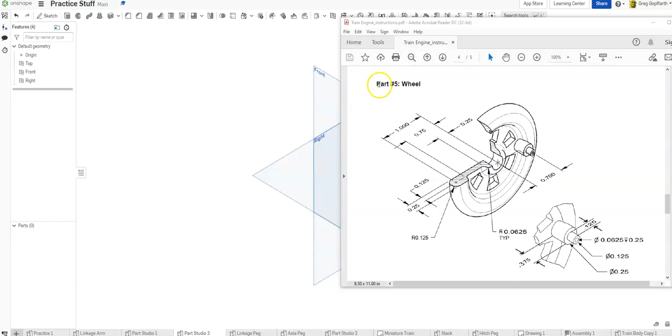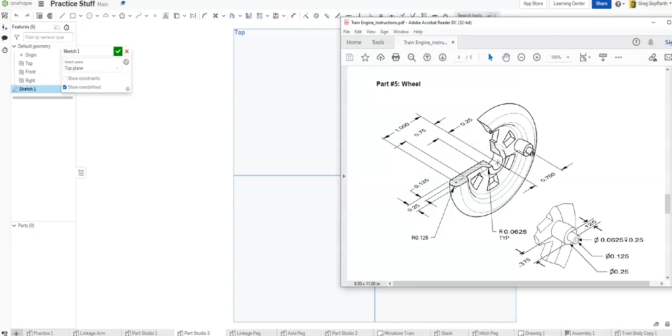That just disappeared here. There it is. So I'm going to draw this on, drawing this shaded section, on the top plane. I'm going to create a new sketch on the top plane. When I look at this, there we go. I'm going to pull this out a little further so I can have

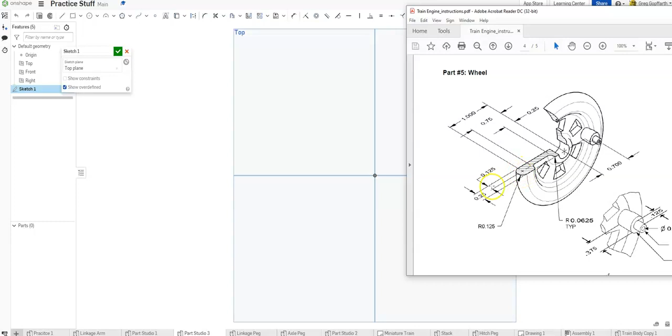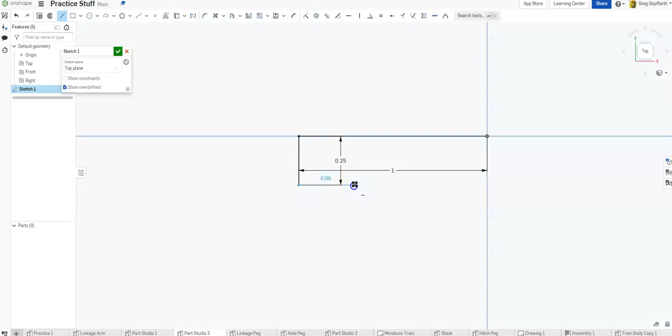a little more room because I don't need it that far out. There we go. So I'm going to make a line that's 1 inch long, come up 0.25 because that's that thickness, and then I'm going to draw this little indentation there. So, 1 inch, come down 0.25, and then I'm just going to come over, come in, come over, come up, come over, and over. Now, you can obviously tell these aren't the same.

Okay, so I'm just going to do some equals. This should equal this. Oh, now they're the same. These two should be equal to each other. There we go. And so let's take a look.

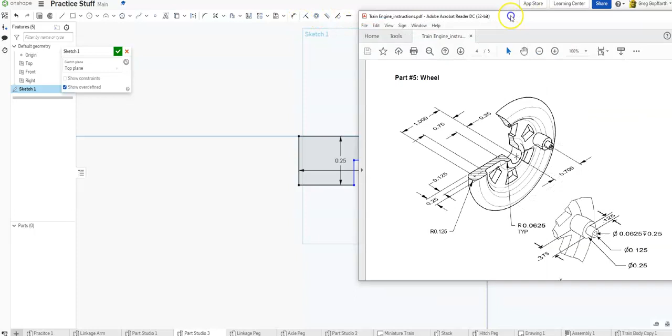Well, here I'm going to move some of these guys around. Move that up to there. Let's move this out to here. Alright. So I see that this little ledge right here is at 0.125. So let's do a dimension from here to here. Should be 0.125. Okay.

So, now that I'm thinking of it, escape. I don't really need those equal. Yep. Okay. So I took those off. Alright, I just needed those two equal.

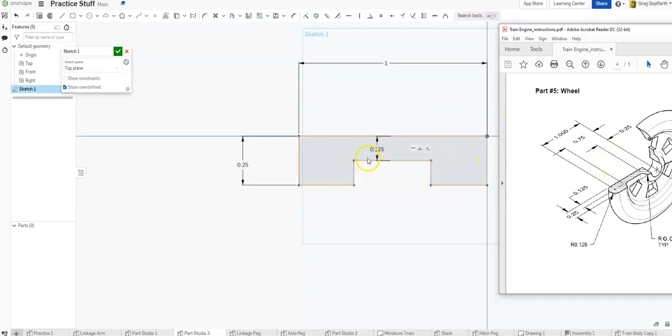So now I'm going to add in my dimensions. So from the center, that's my left side here, I need to go over 0.75 to this edge and 0.25 to this edge. So I'll do both of those real quick. Here to here, 0.75. Here to here, 0.25. And then I have a rounded in at the end out here, so it comes out even further.

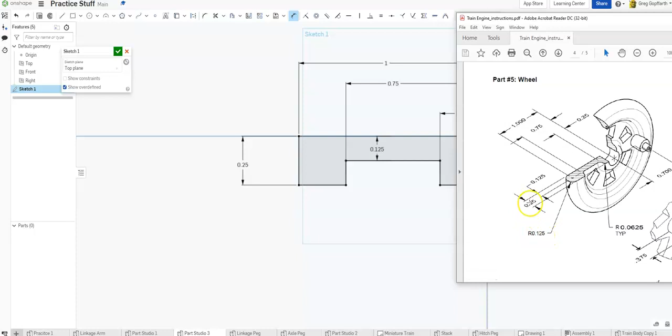So I'm just going to draw a circle that has, since the radius is 0.125, I know that's half of 0.25. So all I got to do is just draw a circle, find the midpoint, anchor it to that circle. There we go. So I am finished with that.

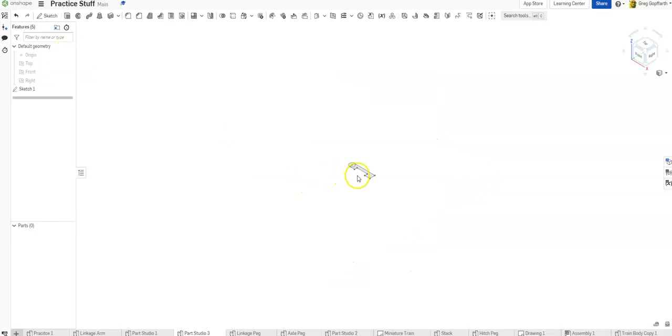Come in here to my ISO view. I'm going to get rid of all my little, and I don't even think I need the origin anymore. Alrighty. And so now I'm going to revolve this, about this, green check, and I got it.

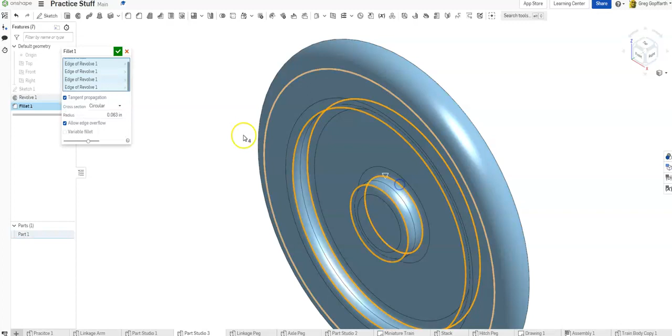So this looks really choppy compared to this, but if you look, this is supposed to have, all these are supposed to be rounded. So I'm going to do the fillet 0.0625. So come in here with a fillet 0.0625, and I need that, and that. Green check. That looks better.

Alrighty. Well, since we're here, let's go ahead and throw the peg, this little circle in there. So I can see that it's 0.7 off. So I'm going to, on this flat surface here, I'm going to create a new sketch.

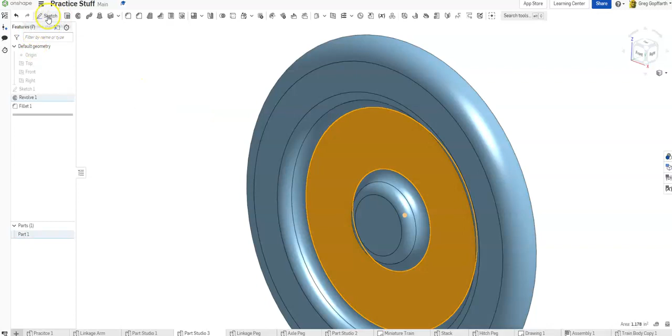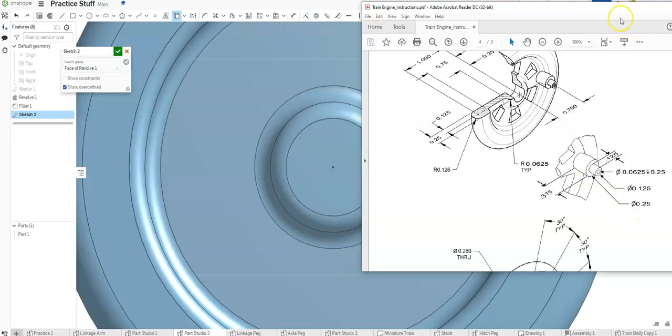So that's going to be on my front view there. And I am going to use this because that gives me that center line. And I'm going to, oh, let's see, how big is that little circle? Let's look at it over here. Keep on clicking on the picture. Let's see, right here, diameter 0.25. Alright. So do a circle.

I'm going to see how I got the dotted line. That's what I want. So it's anchoring it out there. Okay. So that's a constraint. And I need it 0.25. There we go. So it is horizontally constrained there. Dimension from this center point to this center point is supposed to be 0.7.

That's right there. And then this part here is extruded up 0.375. So I'm going to green check that. I'm going to extrude. And I can't select it, but I can.

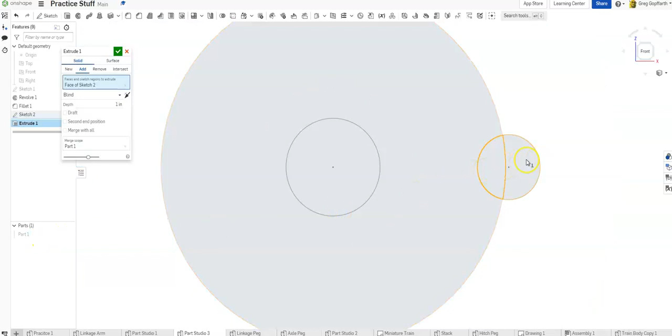I'm going to turn off that. There we go. Turn that back on. We're adding this. This is going up. I said 0.375. And let me turn this around. There we go. Alright.

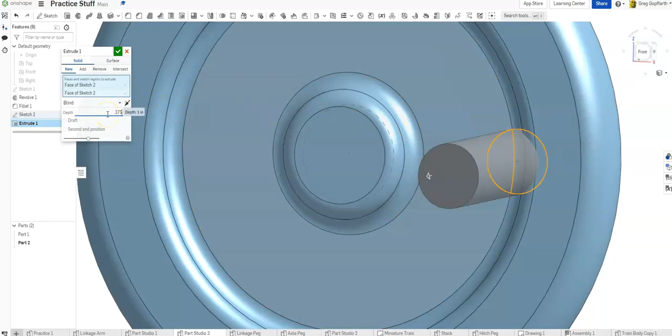And we're adding this, and it's merging with all. So I still only have one part. I need to go ahead and rename that. And that's right. It should be inside that wall just a little bit. Okay. Now I'm going to go ahead and rename this before I get too much further. Alright. And might as well go ahead and rename this guy here.

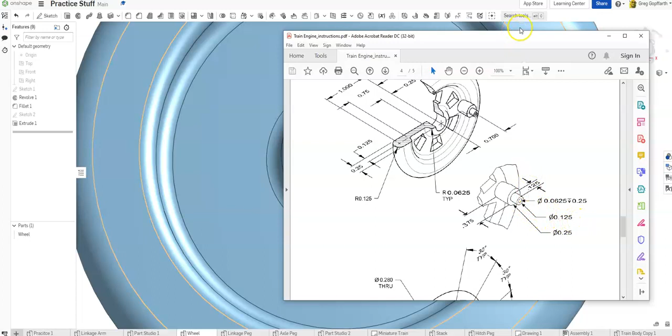All right, so right on top of this guy, a new sketch. I'm once again going to use, which is kind of like a projection - in fact that's what it says if you hover - use project or convert. That way it gives me that center point. Get my circle, start it on that center, and that's a 0.125. I'll finish my sketch.

Extrude this guy right there. 0.125. There we go. So now I got that.

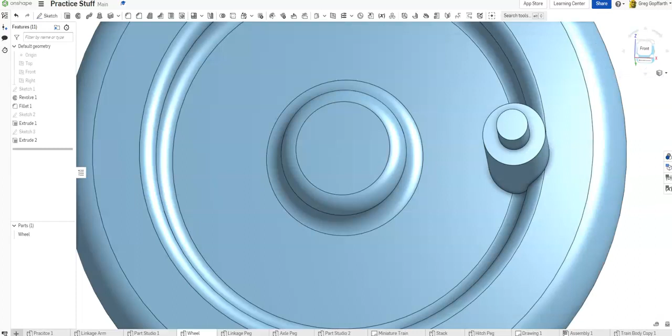So now I need to put a hole in the center. So I'm going to have to create a little sketch here, a new sketch around the top there. Use this just to get the center point. Whoop, there's the center point. That's all I needed, and now I'm going to use the hole feature.

It says this hole has a diameter of 0.0625 and goes 0.25 down. So this is just going to be a simple hole with a diameter of 0.0625, and it's not going through - got to change that to blind - and it has a depth of 0.25.

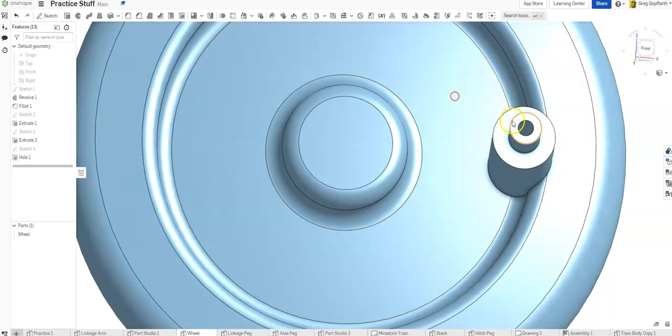You can check that - so if I look, yep, little drilled hole into it. Okay, so I got the front and I got that.

So now it's on to the back. All right, so let me flip to the back. And let's go here, there we go. I need a new sketch on this back.

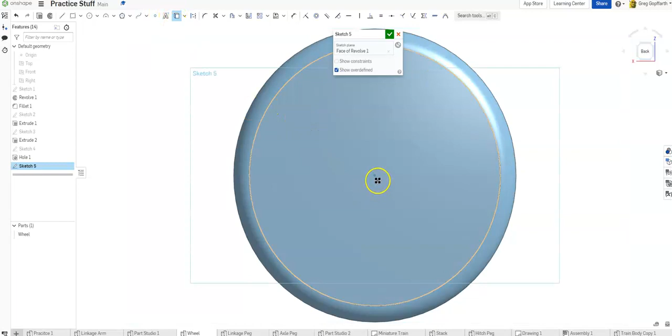First thing I'm going to do is use this, which gives me that center point, which I need. So it looks like I'm drawing a line out to the right, and then a line - so I'm drawing 1, 2, 3, 4 lines, and then I'm going to add in these dimensions, and then I've got 2 circles to draw. Let me get the 4 lines drawn just so I can do it just like they're doing it. So I got this line that comes...

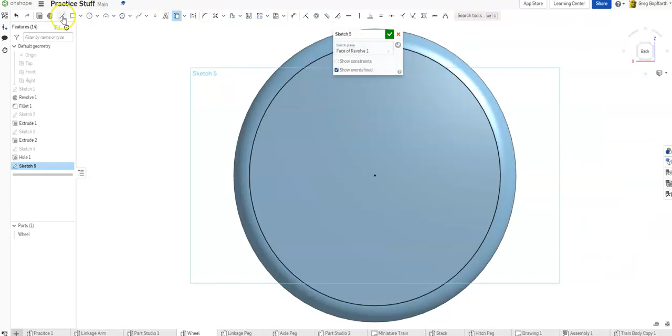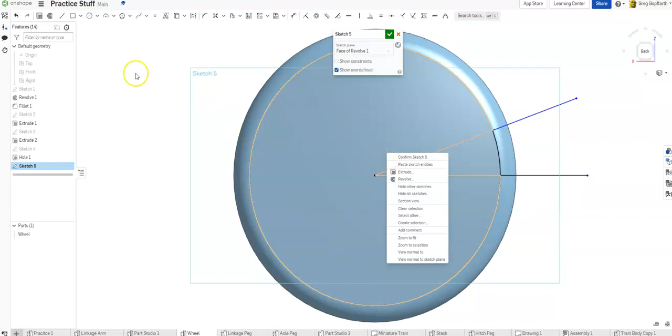All right, and so this says that from here to here is 15 degrees, and from here to here is 30 degrees, and from here to here is also 30 degrees.

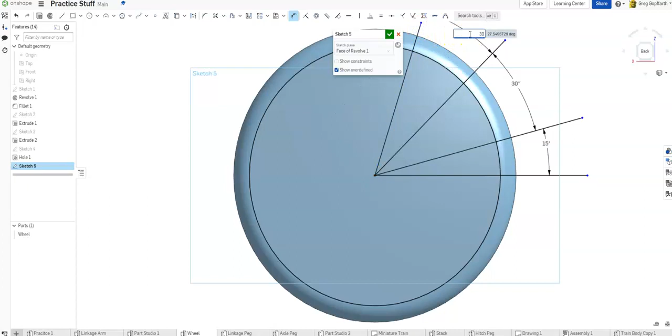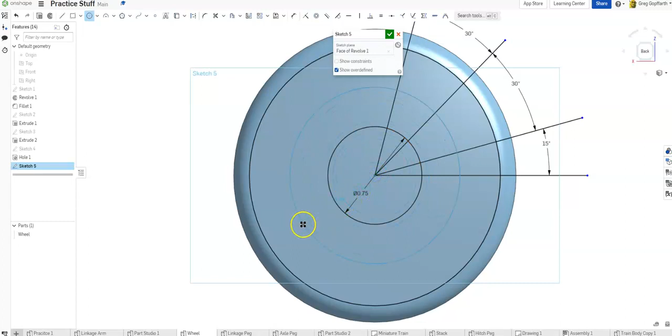Okay, now I got two circles - one that has a radius of 0.375 and one with a radius of 0.625. All right, so I'll have to double those. I'm going to do the first circle, the smaller one - click it, so it had a radius of 0.375 times 2. And then the second circle was 0.625 times 2. There we go.

Alrighty, move those around a little bit so those arrows are out of my way. All right, so there's those two circles.

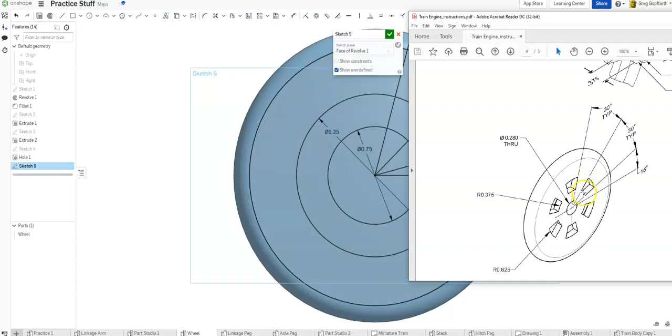So that means I need to cut out this little segment right there. All right, so I'm just going to check because I haven't tried this - because it will let me select that. So let me see if I can finish my sketch. Go to extrude, and I just want to extrude and remove, and I want to do through all. And just select that one little notch. Now let me see if it's going to let me do this.

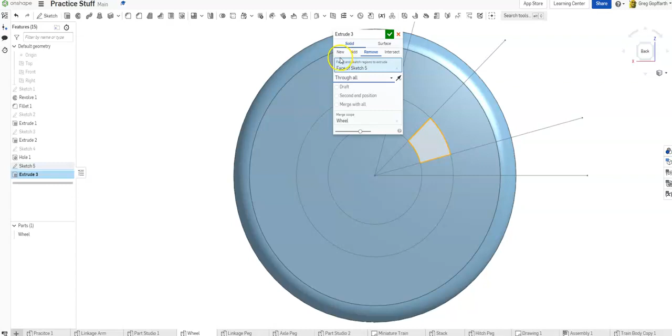I'm going to do that, and then I'm going to do a circular pattern, and I want to select the pattern - won't let me select that. Why won't it let me select that? All right, so normally I would like to select this piece right here, but it's not letting me select it, for some reason.

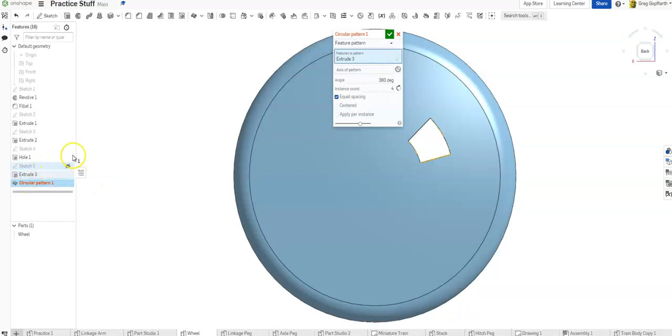All right, oh, I bet I need a feature. I want to select that - ah, there we go. Axis of the pattern will be that, and I need 6 of them. 1, 2, 3, 4, 5, 6. So I forgot to change it to the feature instead of a sketch. So 6 of them.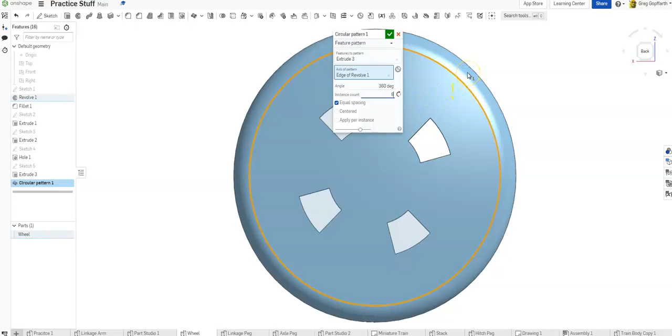Boom. That's looking a lot like that. Cool, green check that one.

All right, oh I'm going to come back here and turn the sketch on. Okay, because that gives me that point. So now I can put that hole, because it says it's a 0.28 through.

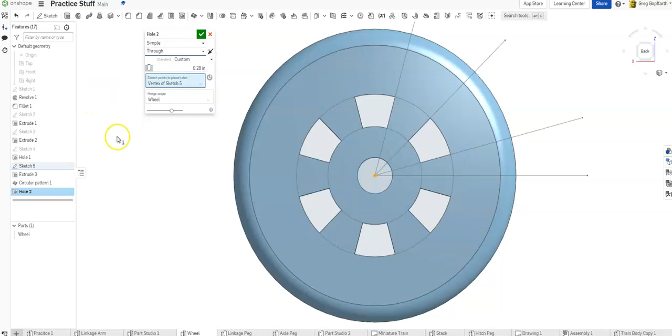So I'm going to come over here, do that. It's a 0.28, and this time it's not blind, it's going all the way through. Green check, turn that sketch off. Looky there. By golly.

We're done, that wasn't too bad. All right, well I got my wheel. Hope that helps.